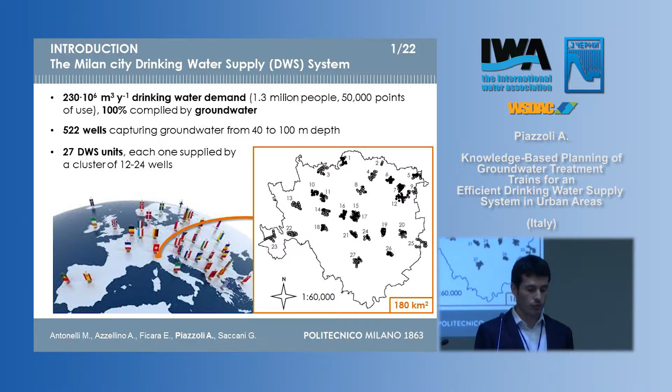Water is then collected and treated in 27 drinking water supply units, each supplied by a variable number of wells, from 12 to 24. The aim of this study was to plan the proper sequence of treatment in each treatment unit of the system, and this operation is usually approached in two steps.

The first step is the determination of the constituents or compounds to be removed or controlled, based on knowledge of the source water quality and regulation limits. The second step is the selection of the proper treatment train, often based on comparison of different alternatives, whose performance can be strongly case-specific and depend on water composition. So very often, experimental evaluation of these processes is required.

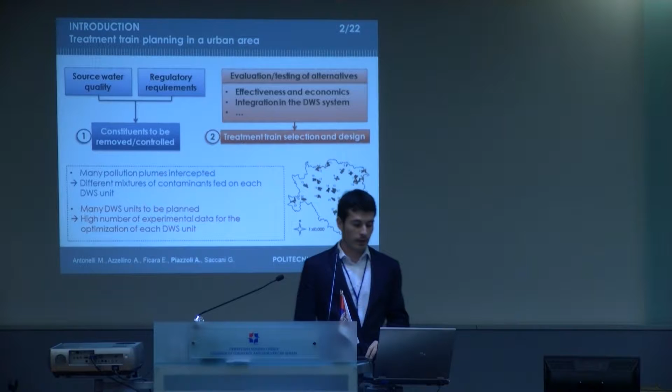In a situation like this case study, there can be some critical aspects. First, we have a high number of wells capturing water from different points, intercepting different pollution plumes, so knowledge of the water composition and the contaminants to be removed can be quite hard. Second, a high number of units must be planned and designed, so a high number of experiments can be required to evaluate the performance of the treatments in each unit.

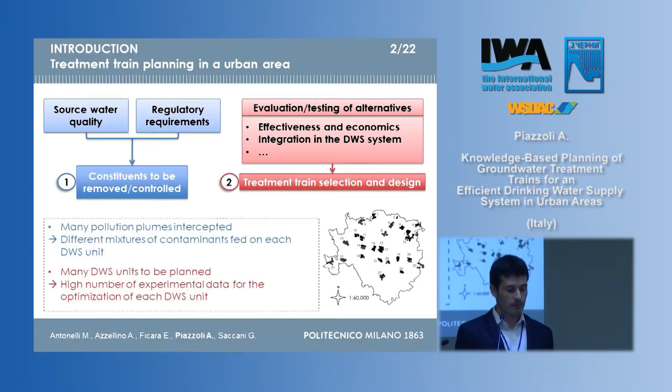So in this work, a data mining approach was applied in order to synthesize the available groundwater quality data and to reduce the number of experiments needed to assess the performance of the processes.

This is the data set that was analyzed. It derived from the monitoring activity of the drinking water supply service of Milan, and was composed of the values of 88 parameters determined on different groundwater samples captured across the urban area. So this database was characterized by a high number of parameters with a quite complex spatial distribution.

Moreover, for some of these parameters, values higher than or very close to the Italian standards were found, in particular those reported in the slide: nitrate, some groups of pesticides, volatile organic compounds, and chromium.

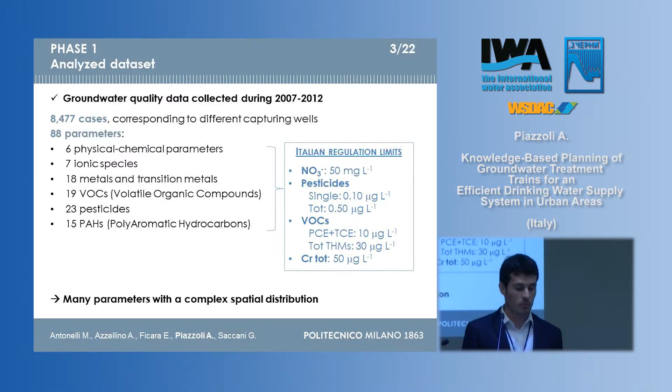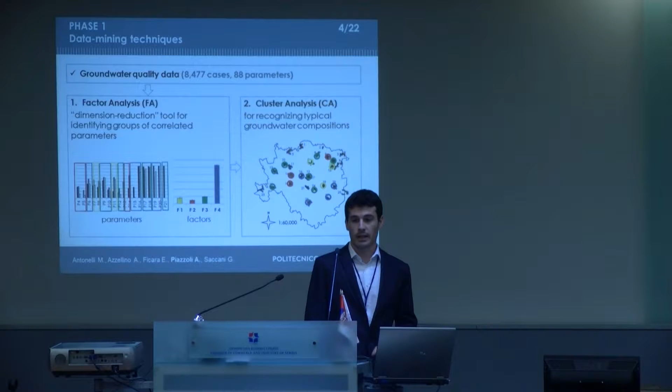This database was analyzed using a data-driven approach consisting of a sequence of factor analysis and cluster analysis. Factor analysis was applied as a dimension reduction tool to reduce the size of the original database. This tool allows identification within a large data set of groups of parameters strongly correlated, considering them as a unique parameter called a factor. Then the spatial distribution of these factors was evaluated by cluster analysis, aiming to recognize typical groundwater compositions in the capturing wells and then in the treatment units.

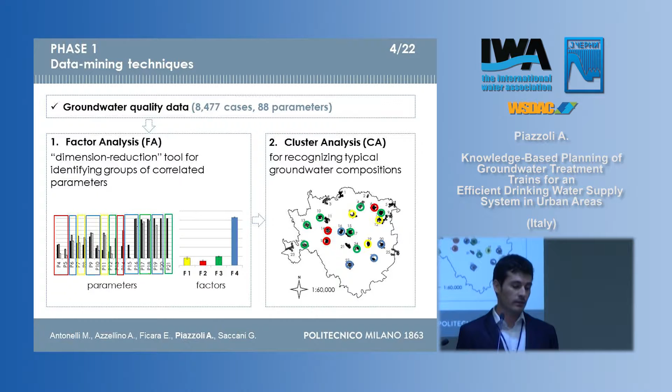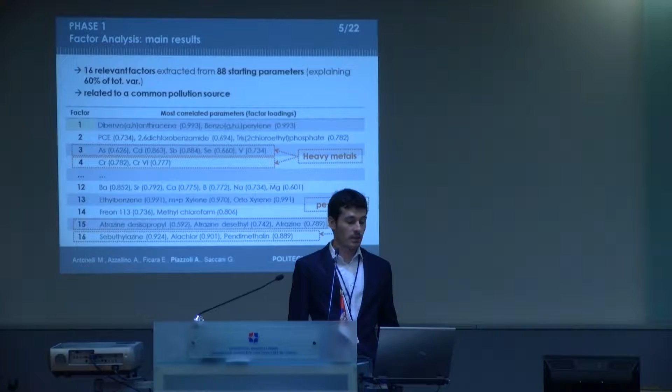So let's look at the main results. Factor analysis allowed us to extract 16 relevant factors from the starting 88 parameters, and these factors explained almost 60% of the total variance of the data. So we were effectively able to reduce the size of the database without losing the information associated with the original database.

Moreover, it could be noticed that the parameters most correlated to each factor were always related to a common source of pollution or shared very similar physicochemical or mobility characteristics. Some of these factors are reported in the slide. For instance, I've marked factor number 3 and 4, which are associated with pollution by heavy metals, and factors 15 and 16, which correlate different kinds of pesticides.

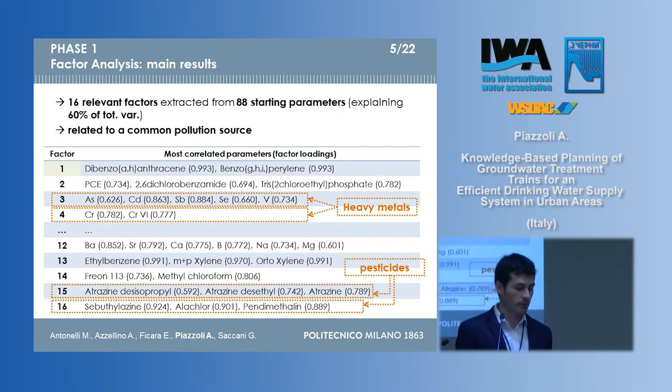Then the cluster analysis was applied, and almost the totality of the data were grouped in 8 clusters on the basis of the factor scores. It was possible to give an interpretation of these 8 clusters by looking at the parameters most correlated to each factor.

In particular, we can see cluster G, in blue, is the most frequent one, grouping about 60% of the data, showing average factor scores and identifying water characterized by average quality. Secondly, we have cluster E, grouping 15% of the data, with a couple of factors slightly higher than average, associated with high nitrate and pesticide concentrations.

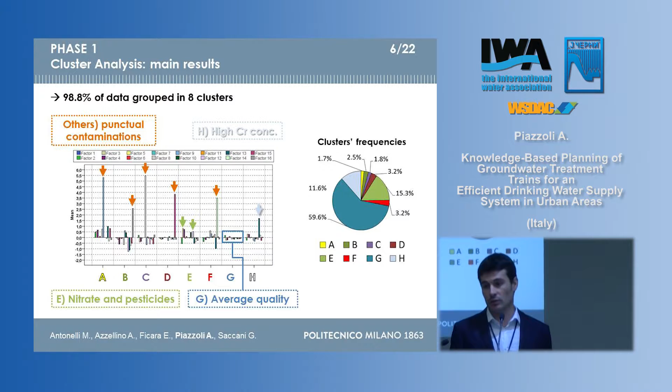Cluster H has high concentrations of chromium, and all the other 5 clusters, indicated by the orange arrows, show one factor with a very high score, associated with punctual and specific contaminations due to the presence of groups of 2 or 3 organic micropollutants.

Finally, the distribution of these clusters in the 27 treatment units of the system was evaluated, and we can notice that there are basically 4 main kinds of treatment units in terms of groundwater composition.

A first group where water totally comes from wells belonging to cluster G, so with average quality. Another group fed by water coming from a mix of cluster G and E. Another group with the further presence of cluster H. And a last group with units characterized by the presence of at least one of the other clusters, so affected by specific and punctual contaminations.

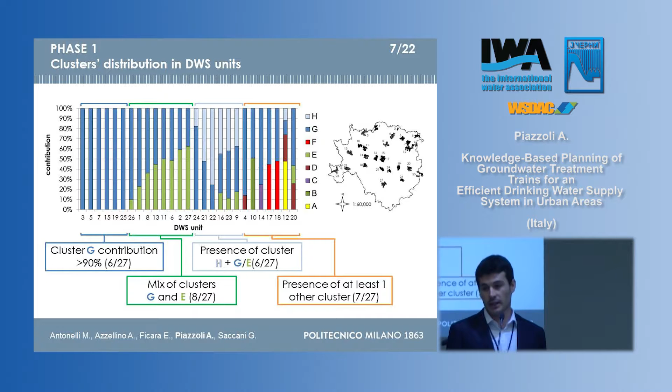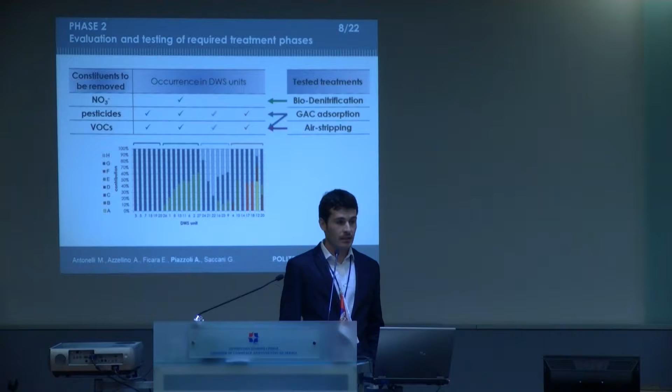Thanks to the data mining techniques, we were able to identify the groundwater composition in each treatment unit of the area. On the basis of the regulation limits, the constituents to be removed were individuated, and possible treatment processes were selected and then experimentally tested.

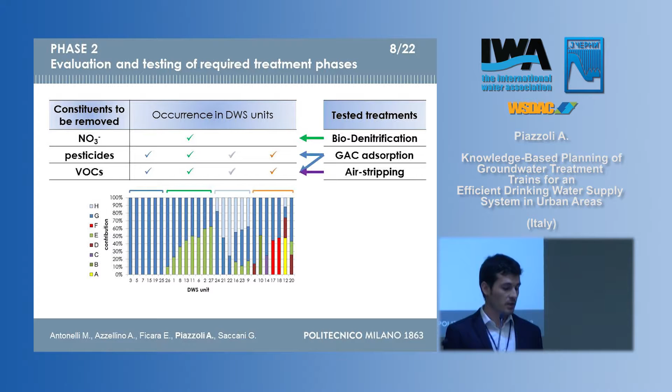In the second part of the presentation, I'm going to show the main results of these experiments. The most important point is that the data mining results were used to select the most representative groundwater samples to be tested during the experiments.

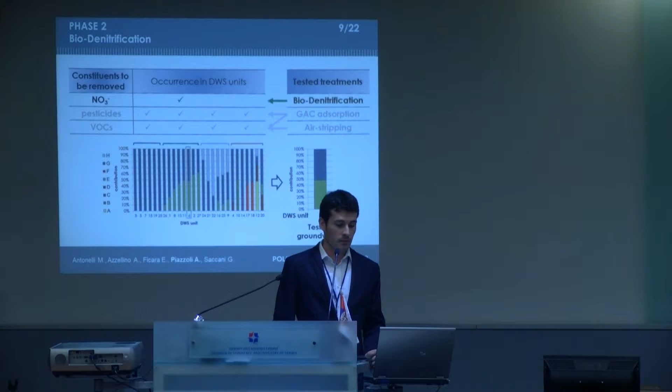Let's start with the evaluation of the biological denitrification process for the removal of nitrate, which was tested on a groundwater sample coming from unit 6, reported in this slide.

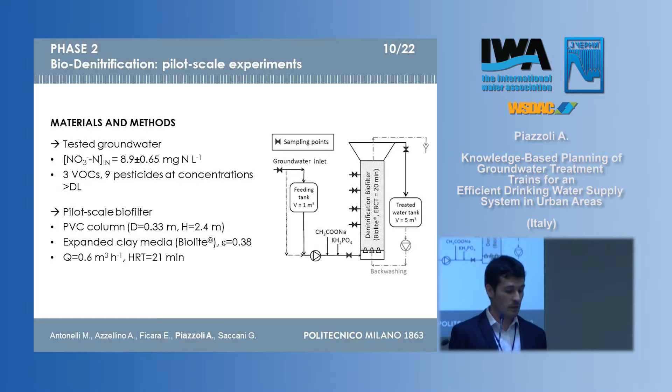The process was tested at pilot scale in the biofilter reported in the slide. You can see the main parameters of the experiments. The biofilter was fed with groundwater coming from capturing wells, affected by the presence of nitrate, and also by different kinds of organic micropollutants, some volatile organic compounds and some pesticides.

We found that satisfactory removal of nitrate and nitrite concentrations in the effluent, below the Italian regulation limit, were obtained for a carbon supply higher than 90% of the stoichiometric demand, and for volumetric load values lower than 0.8 kilogram of nitrogen per cubic meter per day.

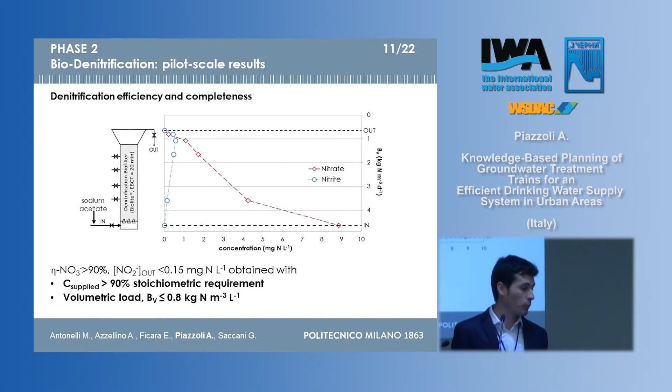So we have found that denitrification was suitable for the removal of nitrate. However, in all the treatment units of the system, we also have to remove pesticides and volatile organic compounds.

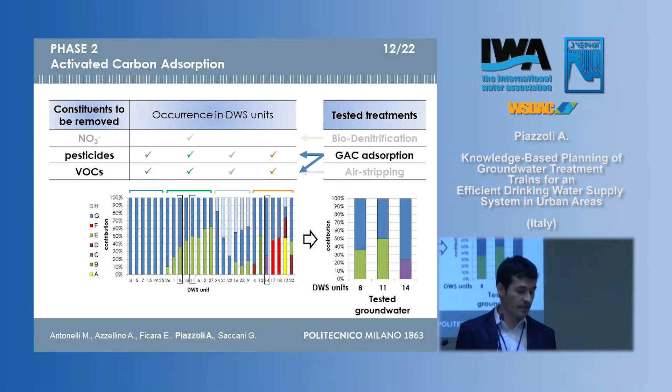For this reason, we tested the performances of the adsorption process, in particular on 3 groundwater samples: 2 coming from units 8 and 11, selected as representative of an average and diffuse contamination, and samples from unit 14, representative of a punctual and specific contamination due to the contribution of cluster C, in purple, in the captured groundwater.

The process was tested at laboratory scale by a series of experiments for the determination of equilibrium isotherms. Let's look at the main results. In the chart, the maximum removal efficiencies for the different groundwater samples are reported for all the organic pollutants initially present in the water. We can see that pesticides, despite the low concentration, were well removed in all the samples.

Most of the volatile organic compounds showed a quite low removal efficiency, probably limited by the low initial concentration. Three volatile organic compounds, also those regulated by the Italian drinking water standards, were initially present at significant concentration: perchloroethylene, which showed the highest removal efficiencies; trichloroethylene; and chloroform, which showed the lowest affinity with the activated carbon.

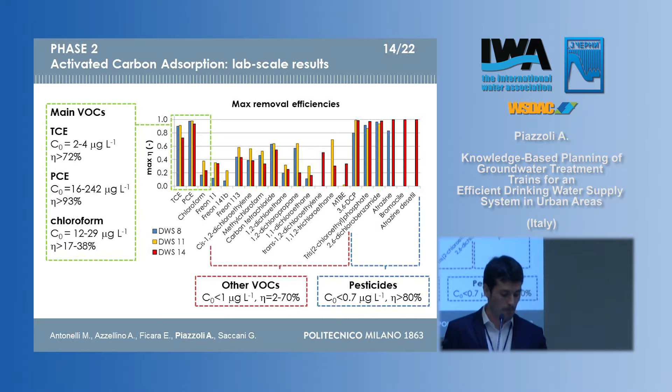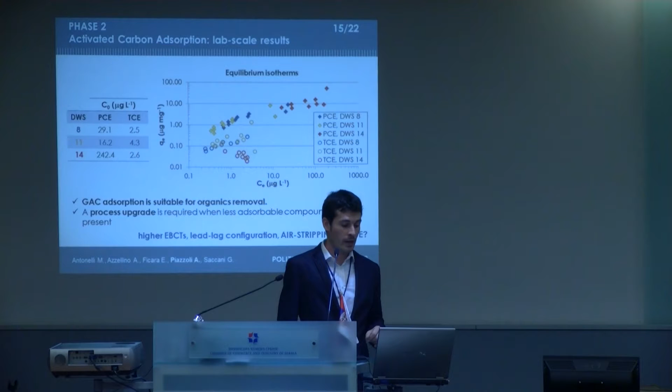Another interesting aspect found with these experiments is shown in this slide, which reports the equilibrium isotherms computed for PCE and TCE in the three groundwater samples. It can be noticed that PCE is similarly removed in all the samples, despite the very different initial concentrations. On the contrary, TCE showed a very low removal efficiency in the samples from unit 14, shown in red, despite the initial concentration of TCE being comparable in all the samples. The reason is probably the high concentration of PCE in that kind of groundwater, suggesting the occurrence of competition phenomena between these two compounds.

These experiments showed that adsorption is a suitable process for the removal of these organic micropollutants. However, in presence of less adsorbable compounds like chloroform, or competition phenomena like PCE and TCE, an upgrade of the process could be required. Among the different alternatives, we wanted to test the adoption of an aeration step before the adsorption phase.

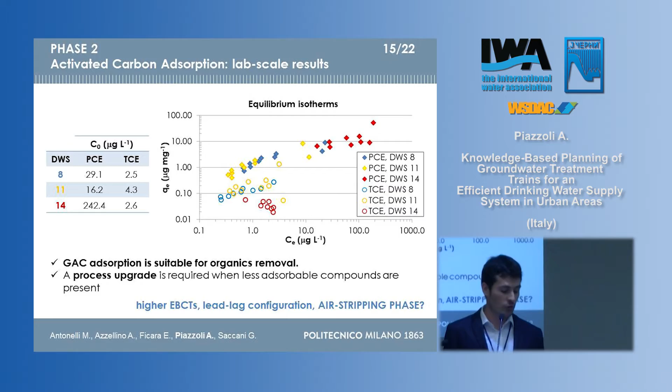The reason was that many units in the system were affected by high levels of volatile organic compounds. So air stripping was tested, in particular in groundwater coming from unit 12, at pilot scale. I want to point out the very low air-to-water ratio, the very low airflow adopted during the experiment, since our goal was to partially remove the most volatile organic compounds during the aeration step.

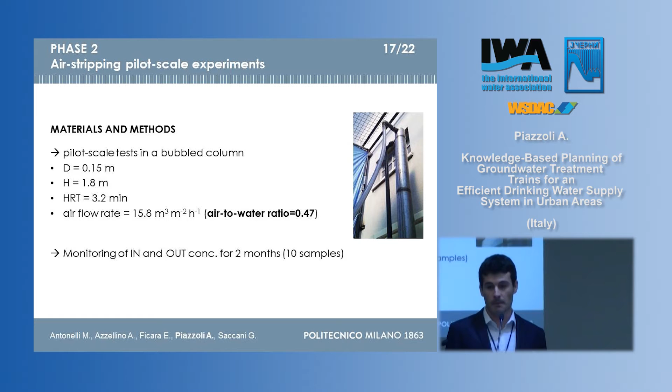This was in order to increase the lifetime of the carbon. We found that the compounds initially present at relevant concentration were removed with significant efficiencies, also with these very low values of air-to-water ratio, confirming the suitability of this solution for the treatment of this kind of water.

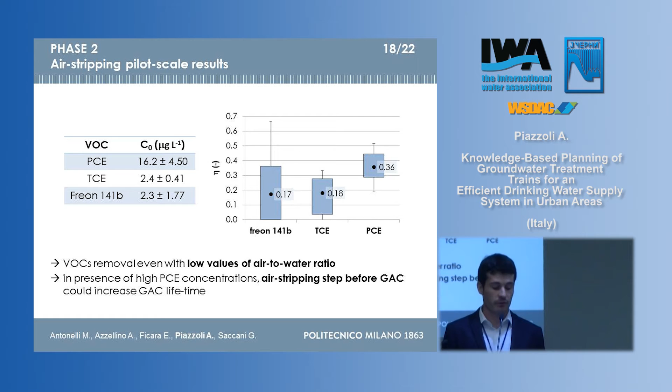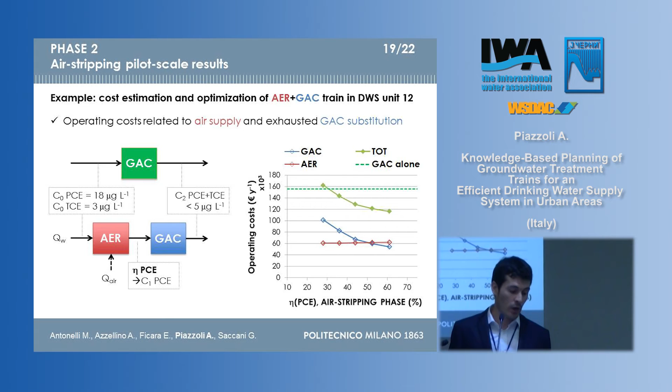We evaluated the operating costs related to the air supply in the aeration phase and the substitution of the activated carbon in the adsorption phase, fixing the PCE concentration at the inlet and outlet, and varying the removal efficiency in the aeration phase. We observed that a significant decrease of total cost could be obtained already from removal efficiencies around 30% in the aeration phase.

Let's look at the main conclusions. In this work, a knowledge-based approach was applied for the planning of the treatment trains of a drinking water supply system, in particular in the city of Milan. Data mining techniques allowed us to identify the main sources of contamination affecting the area and the typical water quality fed in each treatment unit. The most suitable processes were identified based on experimental results obtained on few and specific representative groundwater samples. These results had general validity and could be extended to the whole urban area.

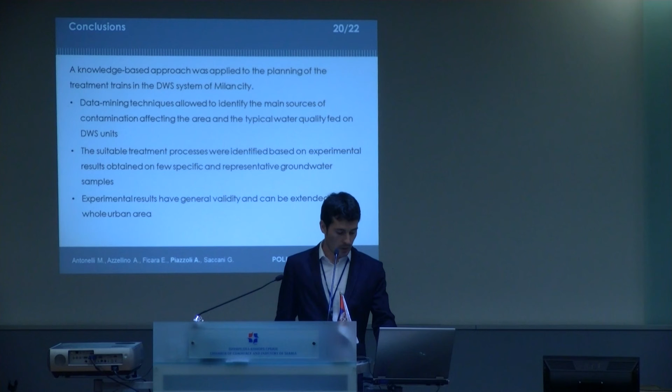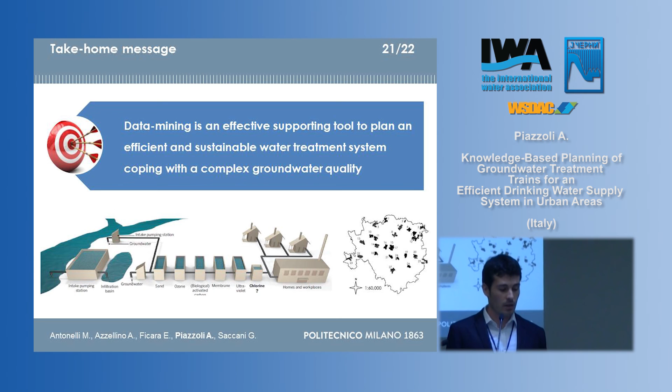So the main conclusion is that data mining is an effective supporting tool to plan an efficient and sustainable water treatment system, coping with complex groundwater quality.